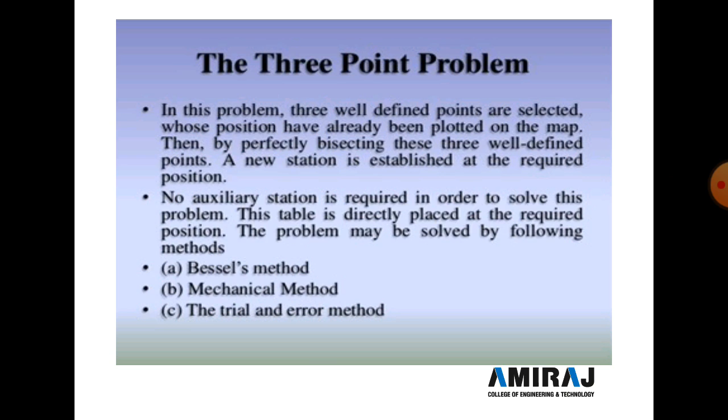So no auxiliary station is required in order to solve this problem. The table is directly placed at the required position. The problem may be solved by three methods. The first one is Bessel's method, the second is the mechanical method, and the third one is the trial and error method. In the examination, this question is asked as: what is the 3-point problem, state the three methods to solve the 3-point problem, and explain any one method in detail with a figure.

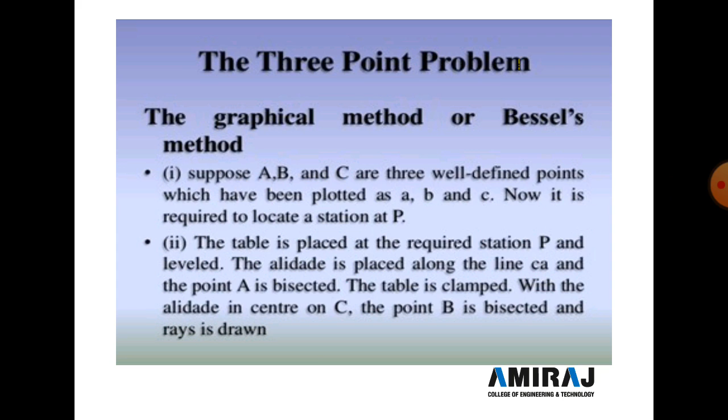So let's start with Bessel's method. Another name for Bessel's method is the graphical method. Here we discuss this method using this figure. Suppose A, B, C are three well-defined points on the ground, which have been plotted as small a, b and c on the plane table paper, and we need to set the new position of point P on the ground.

The first step is that the table is placed at the required station at point P and leveled, and the alidade is placed along the line CA. This line is already drawn as the AC line. Put the alidade on the CA line, bisect point A, and then the plane table is clamped, meaning fixed. Then, with the alidade centered on c, bisect point B and draw the line; this line is an imaginary line.

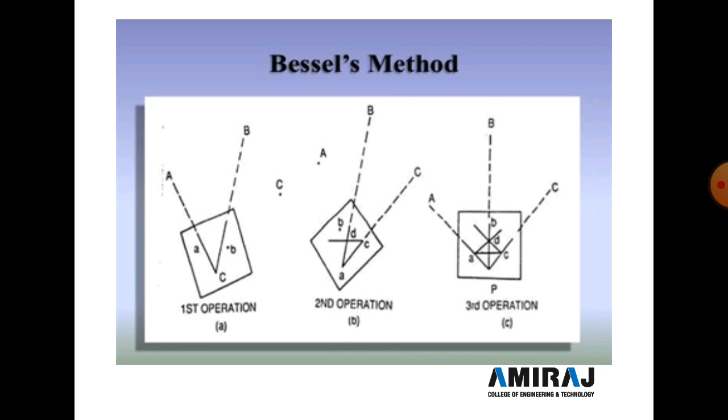So the alidade is placed along the DB line, and point B is bisected, and the table is then perfectly oriented. Then rays through capital A and small a, capital B and small b, and capital C and small c are drawn. These three rays intersect at a point P, which is marked on the paper as small p, and by using the U-fork plumb bob we easily transfer it from the paper to the ground and mark this point with a wooden peg.

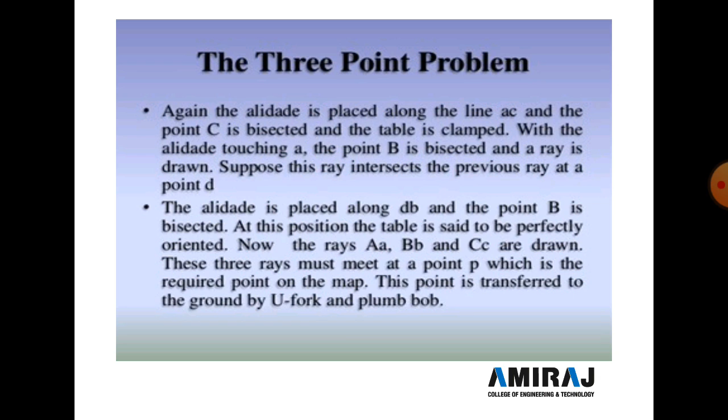Now the next method is the mechanical method. We discuss this method from the figure. Suppose A, B, C are three well-defined points, plotted on the map as small a, b, c. To locate the station at capital P, the table is placed at P and perfectly leveled. There are three steps: leveling, centering and orientation.

So the table is placed at point P and perfectly leveled, a tracing paper is fixed on the map, and point p is marked on it. With the alidade centered on point p, A, B and C are bisected and rays are drawn. These three rays may not pass through the points a, b, c, only slightly near them, and the orientation is done approximately.

Now the tracing paper is unfastened and moved over the map in such a way that the three rays simultaneously pass through the plotted positions a, b and c, and then the point p is pricked with a pin to give an impression, small p, on the map, as capital P is required on the map. The tracing paper is then removed, and then the alidade is centered over the p point, and the rays are drawn to capital A, B and C so they pass from the small a, b, c points.

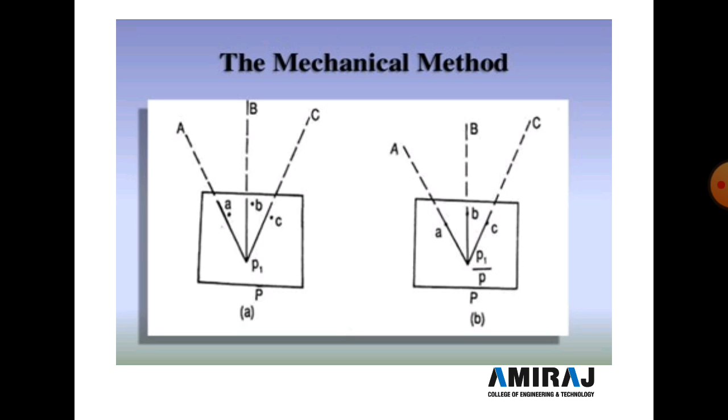So this method is a very typical method. Here accuracy is less as compared to other methods, so it's a mechanical method. Here tracing paper is compulsorily required. And now another method for the three point problem: the trial and error method.

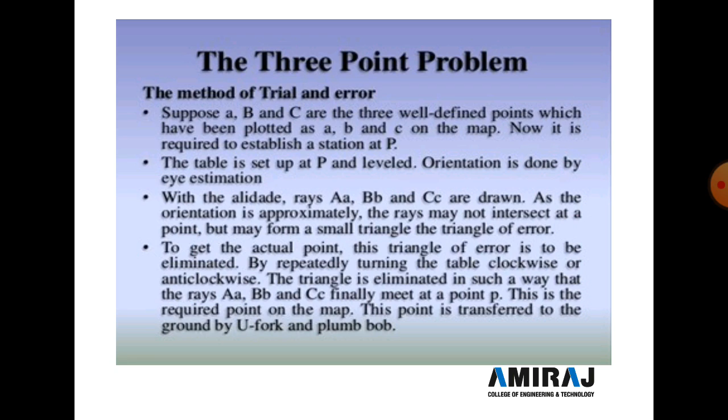So this trial and error method, suppose we discuss from the figure, suppose small a, b and c are three well defined points marked on paper from the ground, and we require to establish a station at capital P point. So the table is set up at P point and perfectly levelled, and orientation is done by eye estimate. Then with the alidade, rays capital A to small a, B to b and C to c are drawn and extended.

If these three lines are not intersecting at one point, the plane table is moved, and then the lines are repeatedly drawn until all three lines intersect at a single point. So this point is perfectly marked on the ground. So this is the trial and error method.

So first we trial a to A, b to B and c to C. A and C are intersecting at the P point, but this line does not intersect at the P point, which means we repeat the task and move the table some distance, and then the lines a to A, c to C and b to B intersect at the P point, when all three lines intersect perfectly at the P point.

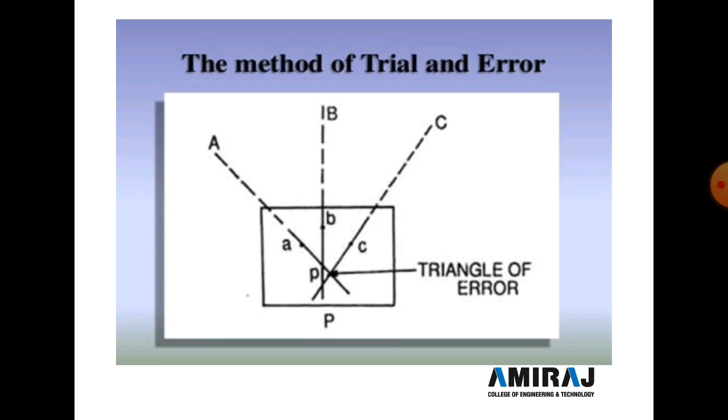So we mark this P point on the ground by using the alidade and U-fork plumb bob. By using the U-fork plumb bob, we transfer the point on paper to the ground and fix a peg at capital P point. So this method is the trial and error method. It is a tedious method, and the result is difficult to get; it's a difficult task.

Now next are the points to be kept in mind in plane tabling. When using plane table surveying, the following points should be kept in mind. First, ground points should be marked as capital A, B, C, D, etc., and on paper these points are marked as small a, b, c, d. So in the last slides, in all the methods we discussed, all the capital ABCD ground points are marked as small abcd points on paper.

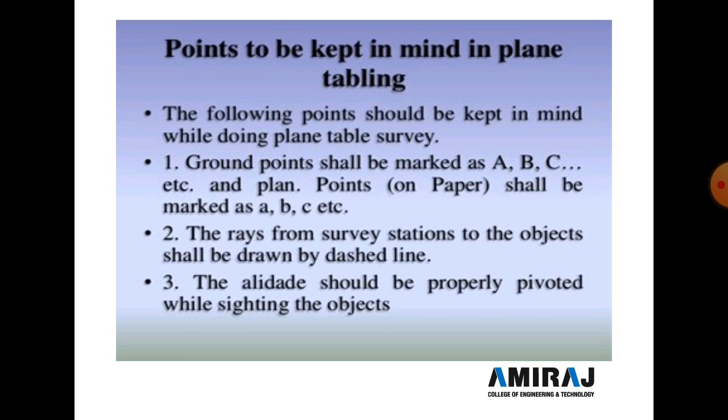Next, the second point to be kept in mind is that the rays from the survey station to the object shall be drawn by dashed lines. So survey station to any object means an imaginary line; this word is repeatedly used. An imaginary line is drawn by a dotted line, or we also use a light line, and the alidade should be properly pivoted while sighting the object. Properly pivoted means properly touching the point, and then we sight the object or bisect the object.

And the fourth point is the first survey station; the scale of the map shall be chosen so that the entire area can be plotted on a paper. So here it means the point which is selected for the plane table should be such that all the points are easily visible from that particular point.

And while establishing the magnetic north on the paper using the compass, things causing local attraction shall be kept away from the table. So local attraction affects the north direction. We use the magnetic needle for marking the north direction, but if in a nearby area any pole is there, like an iron pole, or any magnetic field is there, the north direction is not perfectly marked on the paper, because the magnetic needle moves in the compass.

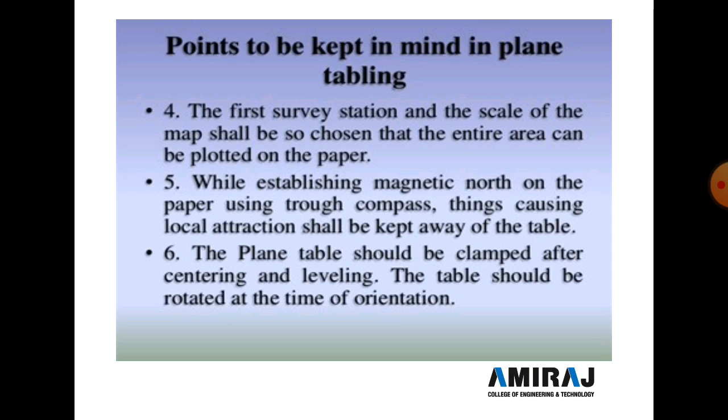And then the sixth point is the plane table should be clamped after centering and leveling, and the plane table should be rotated at the time of the orientation. Means the plane table is clamped, means fixed, after centering and leveling, and no rotation is required. So at the time of the orientation, if rotation of the plane table is required, then rotate.

Now next is the errors in plane tabling. There are mainly three types or classifications of error in plane table surveying. In the GTU examination, this question is also asked for 4 marks, like analyze the errors in a plane table and explain in detail. So there are three types of error. First is the instrumental error, second is the error in manipulation and sighting, and the third one is the error in plotting. So one by one we discuss them.

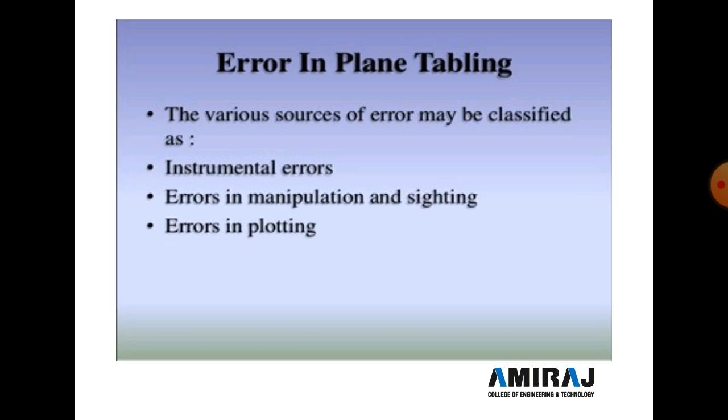So first is the instrumental error. The surface of the drawing board is not a plane. In plane table survey we use a wooden plane table, so if this wooden plate is not perfectly leveled, it's an instrumental error. Second, the edge of the alidade is not straight, means the alidade is bent. So when we take a reading, some error is drawn on the paper. So these are the instrumental errors. What is instrumental error? By using the instrument, error is generated, so it's called instrumental error.

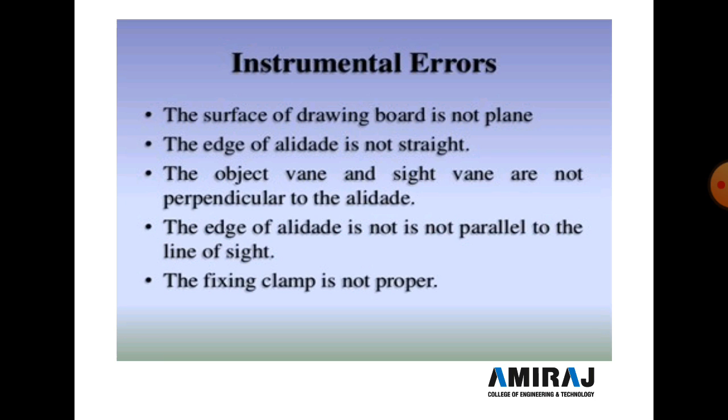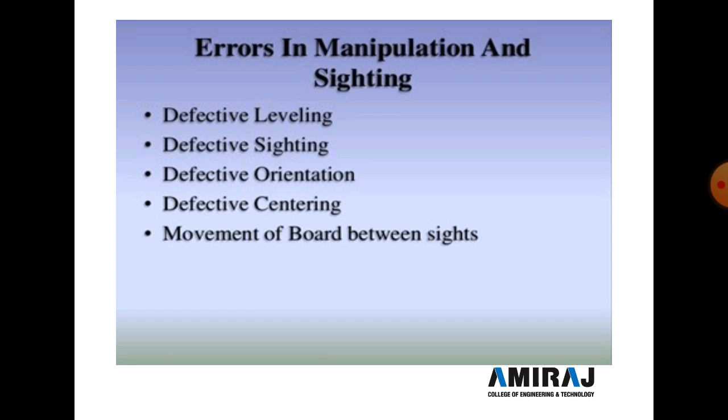Now the second type of error is error in manipulation and sighting, like defective leveling, defective sighting, defective orientation, defective centering and movement of the board between the sights. So these are the errors in manipulation and sighting. Leveling is not perfectly done, means the table is uneven, or sighting is not perfectly done. So these are the errors in sighting.

And errors in plotting. Errors in plotting are divided into two parts. Defective scale of the map, means we take a scale like 1:1, 1:1.5, etc. Some of the part we draw at 1:1 scale, some at 1:1.5, and some at 1:1. So each time the line length is changed, and due to this, error is generated in plotting the area. Now, wrong intersection of the rays drawn from two different stations. Wrong intersecting means the rays do not perfectly intersect at the point. So it's an error in plotting.

So here we complete our first chapter.